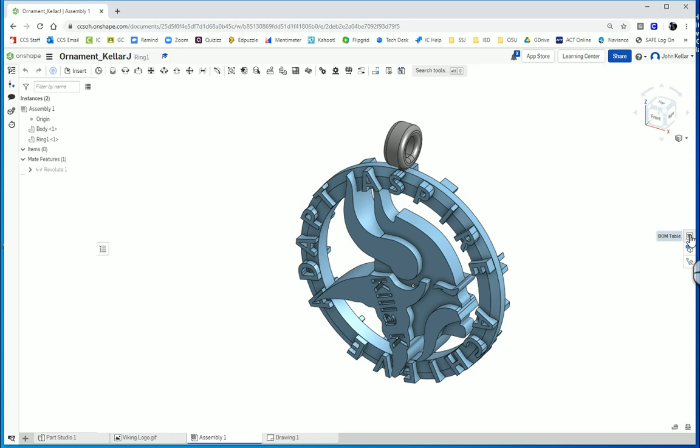The description, which you can insert by going to the assembly page, over on the right, clicking on the little button that says BOM table, and then you can double click in the description column cells for each part and type a description there.

Then you need to have an exploded view, and you can tell this is an exploded view because it's got the lines showing it, and there's one box around the whole thing.

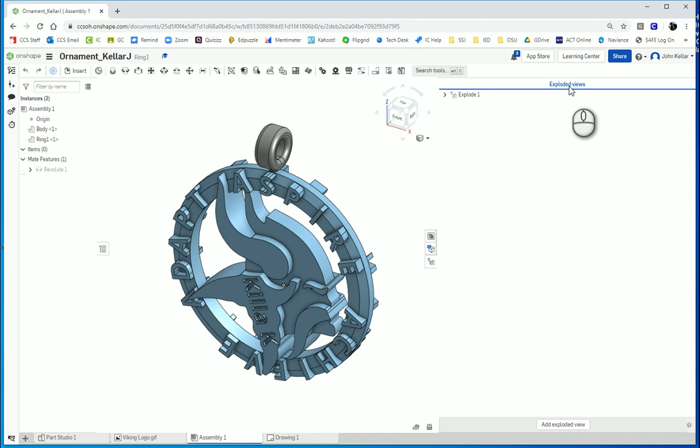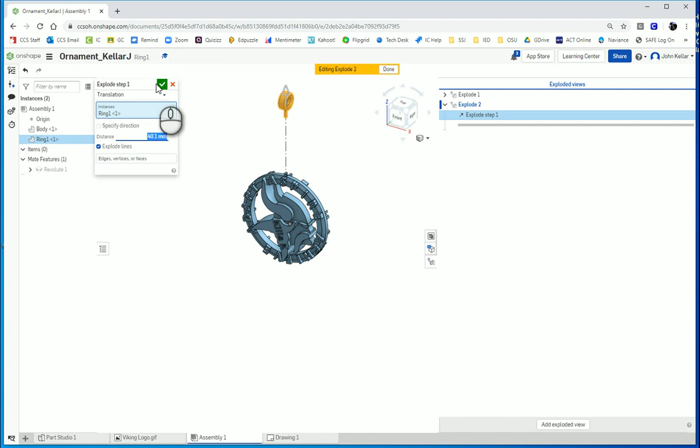Again, the exploded view you can create here in the assembly, clicking on exploded view, and you can add one. Then all you have to do is click on it and see it's got these little arrows, little triad. Grab it and move it up a good distance away, 40 millimeters. You can change the distance right there, and then green check mark, and then you've got your exploded view.

And then you can go back here to the drawing, and you should also have your assembled view, so put that in there in isometric. My ornament has a different front and back, so I inserted a front and a back.

And then you should also have callouts. For the exploded view callouts, just click on it and make the number, and I'll show you how to do that. But here, I put a specific word, so all you have to do is double click.

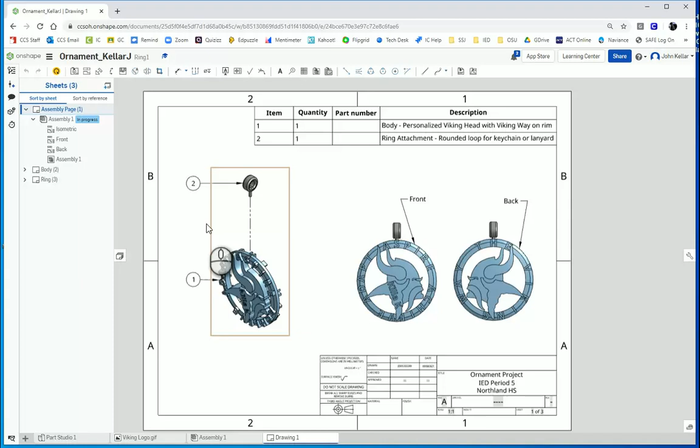And then finally, the fifth part is you need to have a title block. So 5 parts: table with descriptions, exploded view, that's 2, balloons or callouts, that's 3, your assembled view, 4, and then the title block, 5.

Okay, and then after that, you click Add Sheet to add in each individual part with dimensions. Your isometric view shaded, your front view, and then whatever other views are necessary to understand your part.

Mine needs a top view, and then I did a section view so I could put the chamfer on it, and then I did a detail because to put dimensions on here was very small and it would be squished together. So a detailed view helps to see the edges more clearly, and then I can dimension it more easily.

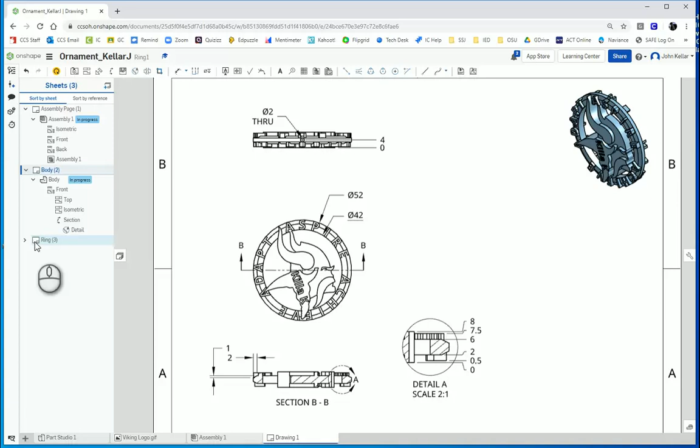So you can watch the video on section and detailed views to see that. And then finally, I have my ring here. I've got my front view and the bottom view showing the pin down here, and that's sufficient for this.

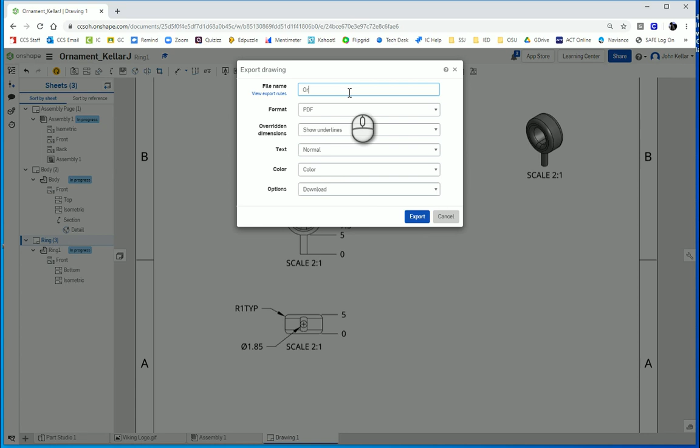So, and then finally, when you're ready, you can export this whole drawing because it's all in one tab. You right click, select export, and then type in your name, ornament underscore your last name, first initial. All these options, format should be PDF, option download, color, and export, and it will go to your downloads folder.

So just a quick refresher how to do that now. I'm going to click here, click create drawing. If your part's in millimeters, choose millimeters. All of these ornaments should be. If your part's in inches, choose inches.

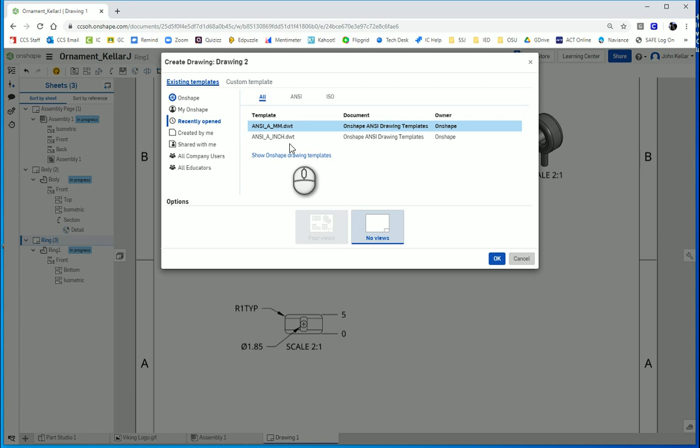So, okay, so this is the assembly page. We're going to select assemblies and assembly 1. And I want to place my exploded view. So over in the little menu box, choose explode position and choose your explode.

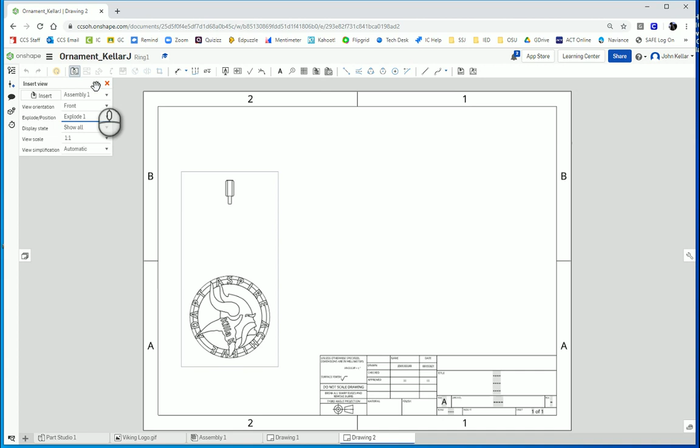And then the view orientation, it defaults to front, but I want the isometric view. So I'm going to change it to isometric and leave the view scale 1:1. So I'm going to put that right there.

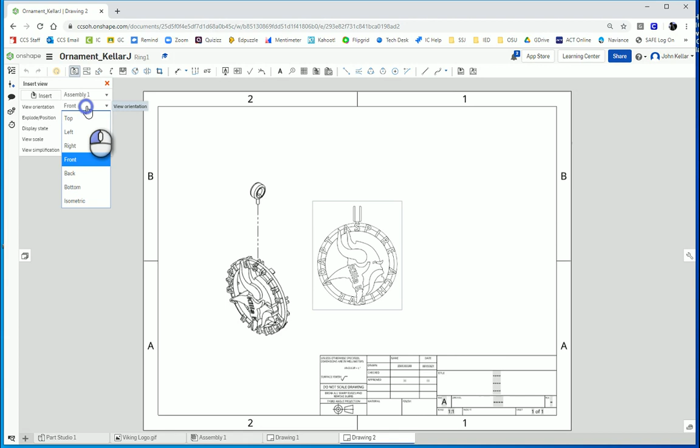Okay, and then I'm going to insert my front view of the assembly, and the back view. I want front, and then I'm going to insert back right there.

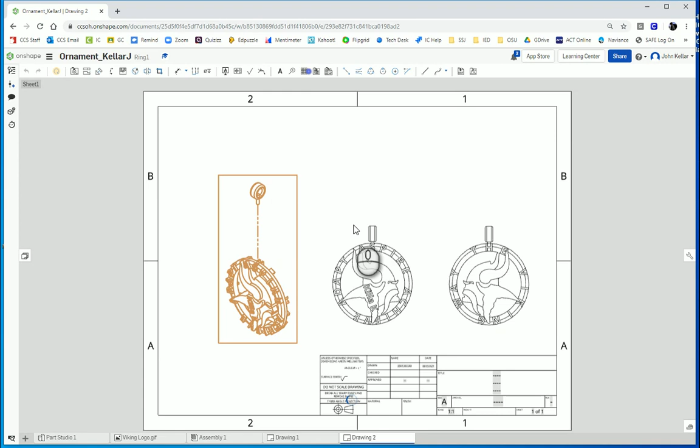Okay. And then I want all three of these to be shaded, so I'm going to right click on that, show shaded view, right click here, show shaded view, right click here, show shaded view.

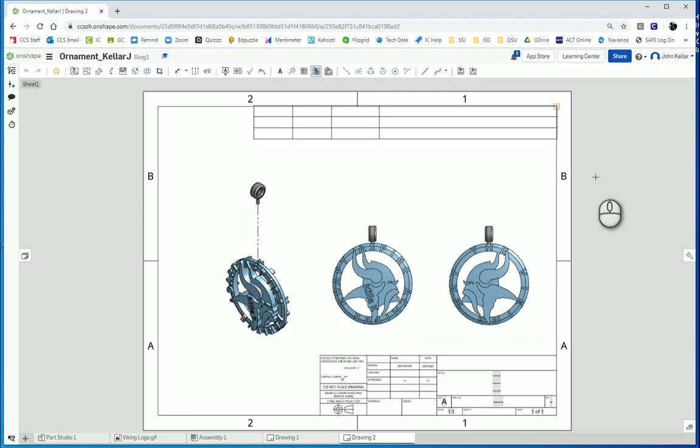And then I need my parts list up here, so I'm going to come up to the top and select BOM table or bill of materials. Assembly 1 is what it should be of, flattened. All these options are the same, and then come up and drop it in the upper right corner. Okay, so that's that. See, it's got the descriptions.

Okay, and now I need my callouts. So I'm going to come up here and select the callout, and I'm going to select my first part here and drag that off straight, and then my next part.

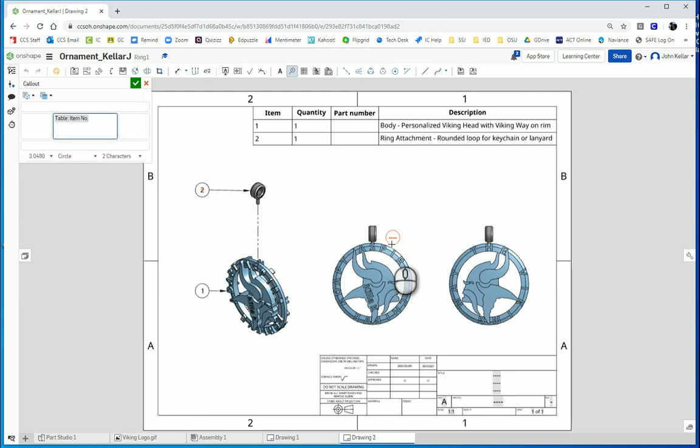There we go. Okay, and then if I wanted to give a specific description of the front or the back, I could place a call out there. Place my balloon, and then I'm going to do that.

Okay, I'm going to green check mark. Now I want to change this one to say front, so I'm going to double click on it, highlight and delete one and type in front. Okay, and I'm going to remove the circle so there's nothing around it. Green check mark, and then the same thing here. I'm going to double click, delete one, and type back, and remove the circle around it.

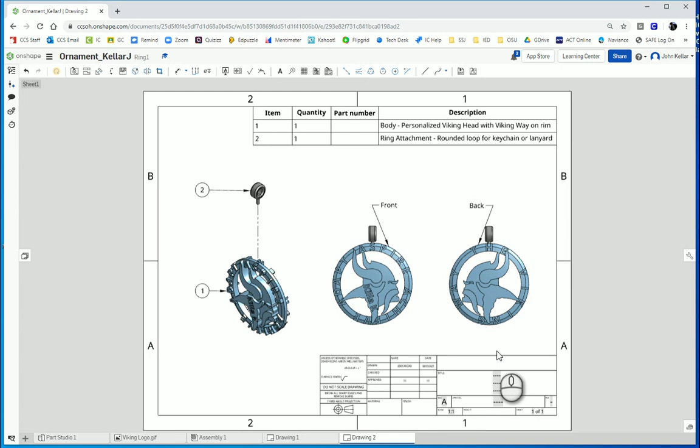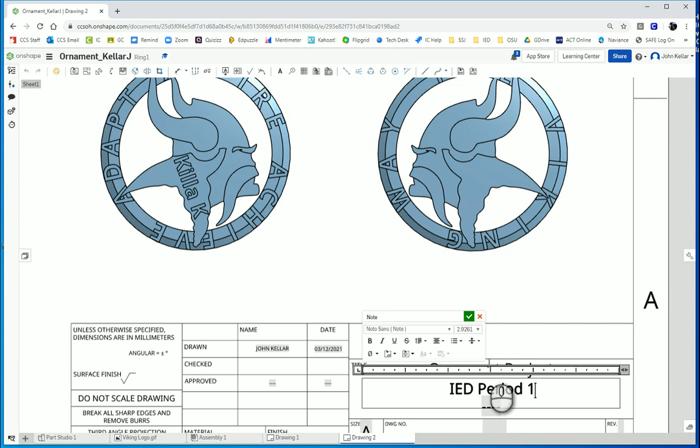Okay, all right, so there's that. And now I need the title block. So let's zoom in down here on the title block. Title, ornament, project. IED, period, whatever yours is. Northland High School. Okay, all right, and that completes the assembly page.

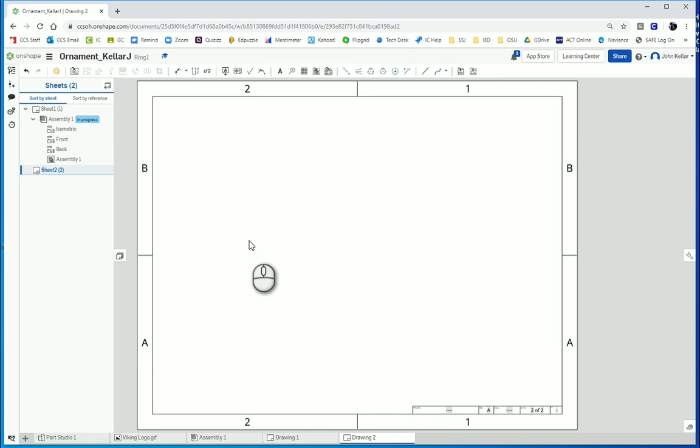So then click on Sheets over here, and we're going to add a new sheet. And then we put on the next part. I already showed you how I did the medallion. So let's just do the body real quick. We're going to insert view, change it from assembly, click on insert, and I want to choose body.

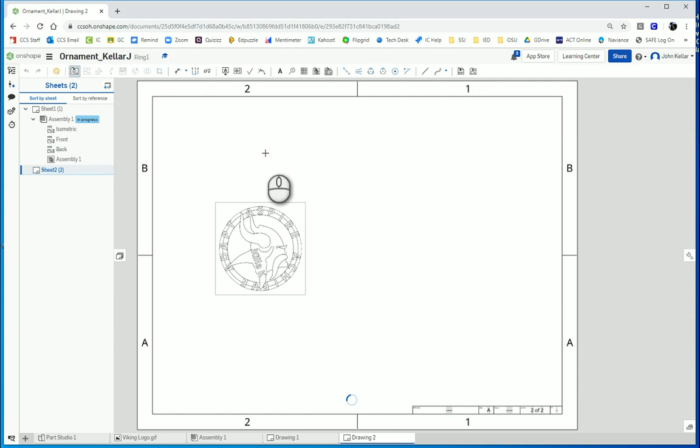So I want the front, and I'm going to change the view scale. Yeah, 1:1 is fine. And then I want the top view projected up here. And always you project when you want your other views from the front. So click on the front, and I'm going to project my isometric view right there. Okay, and I want that shaded.

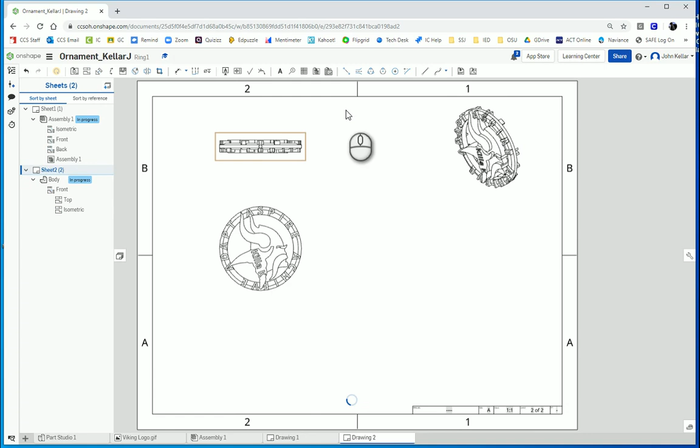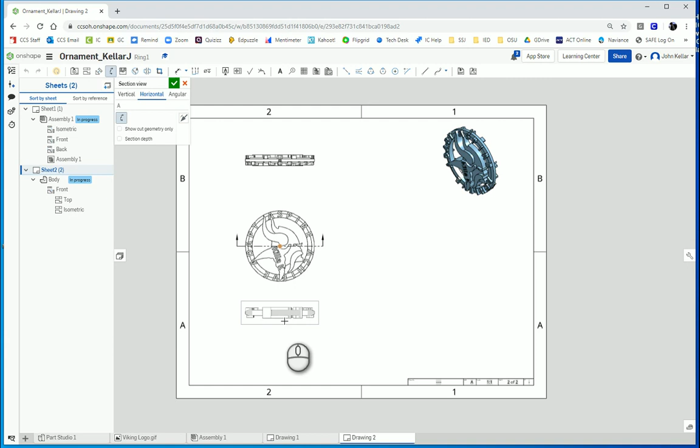Now, I need a center mark for this little hole that's right on the top. So click that. I need a center mark for these rings and arcs, so I'm going to click on that. Notice it puts a center mark there. Okay, and then that lets me do my section view, horizontal. Okay, and I want to project down here, and then I want that detailed view right here. Okay. And you saw I dimensioned this already in the section and detailed view.

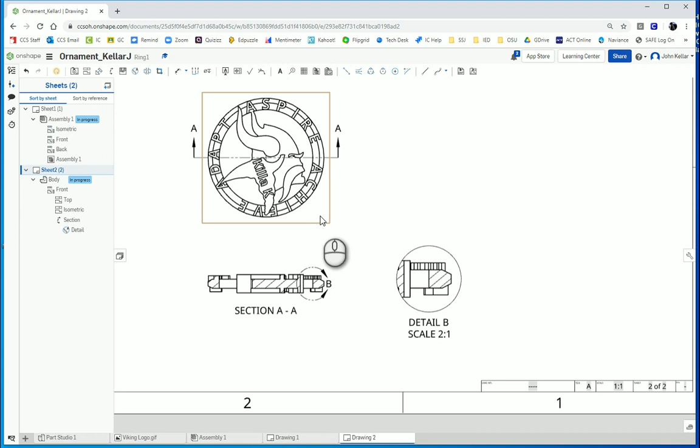Okay, and then I'm going to add another sheet for my ring. So insert view, insert, and I want my ring. And since this ring is going to be super small, see how that small box is? I'm going to change the view scale to 2:1 right here. So there is my front view.

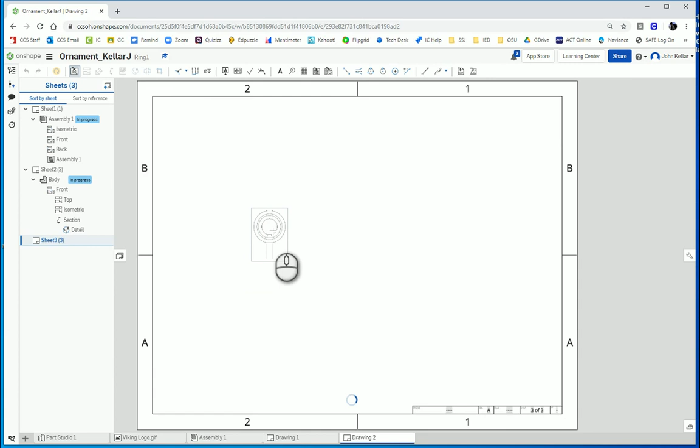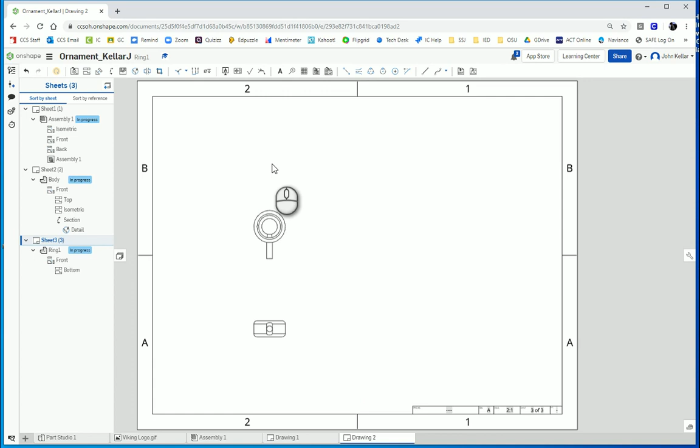And if I do the top view up here, watch. I don't see the bottom of the pin. So rather than projecting the top view, I'm going to project the bottom view so I can see that pin on the bottom, because I need to dimension that and indicate the size of that. So I'm going to delete the top view because I can see all the same things from the bottom and more. So let's dimension the center marks.

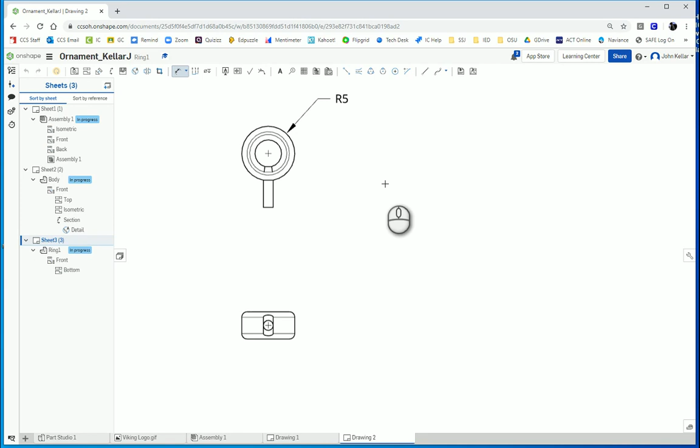There we go. This one also needs a center mark. Let's dimension the outside ring here. Okay, it says that's a radius of 5. Okay, because that's an arc. There we go, radius of 5. Okay.

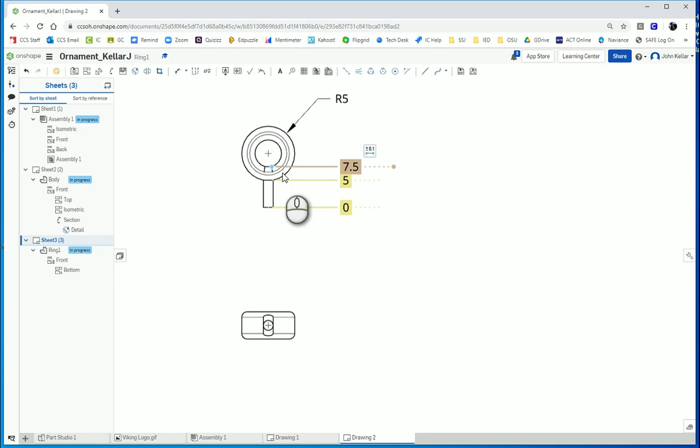And then let's dimension this part here, since this is all offset, we know. So we can get that here. This is our bottom. There. That's how much it sticks out. Boom. And then right here, boom. Okay, so we know the offset is 2.5, so we know the inside radius is 2.5.

Okay, now the bottom here. Let's dimension this right here. That's 1.85. And then we need to tell where that is. So let's, there, and there, right there. So we know how thick this part is.

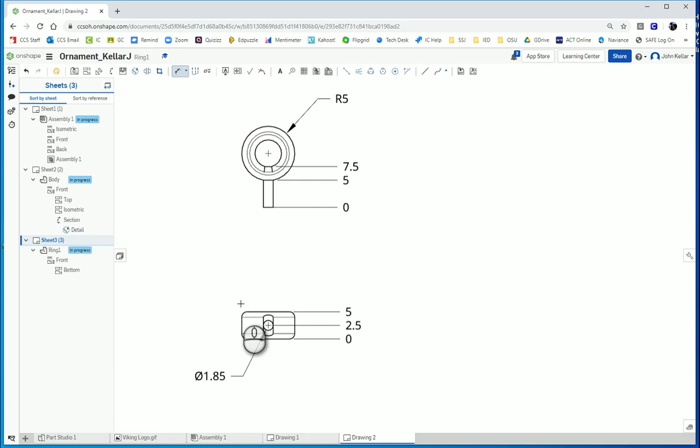All right, and then let's dimension the fillets on the outside. And since they're all the same fillets, we're going to use TYP. So we're just going to dimension one of these right here, R1, escape, and double click on it. And let's add TYP at the end so we know that all fillets are the same.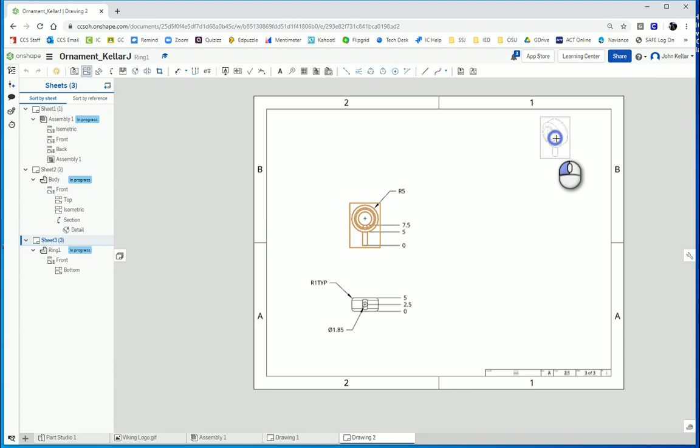Okay. Oh, and we need an isometric view. So let's click on our projected view and let's project that front up here. There's our isometric, and let's right click and shade that. Okay. So now this is fully dimensioned.

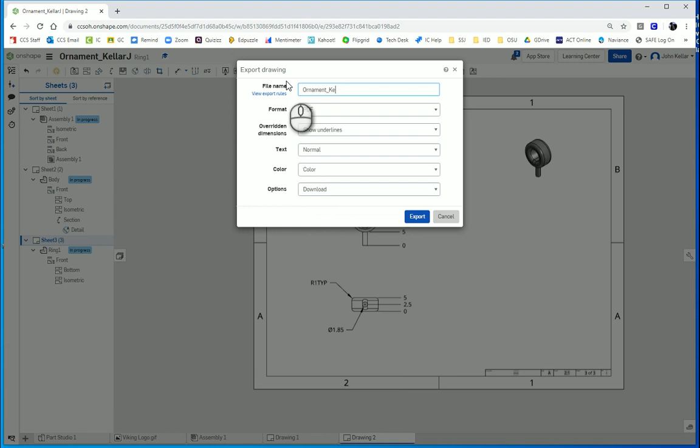To export this, you right click on it on the drawing or 2-finger mouse click, select export. Change the name to the same as your file, ornament underscore last name first initial, format PDF, options download, and click export. Okay, and that will be in your downloads folder, and you can attach it in Google Classroom that way. And that way it's all in one file, all these sheets come together.